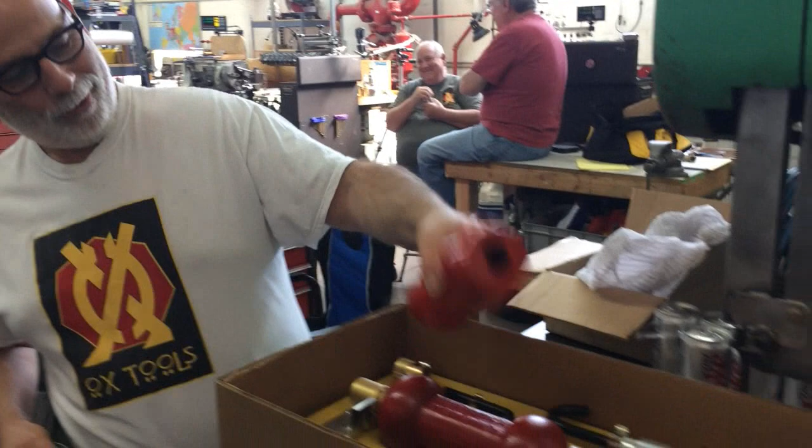So, 6.5 pounds of Channellock persuasion. It's pretty good, for when you really want to beat on something. Adam, you wish you had one of those?

Cool, thank you, very nice.

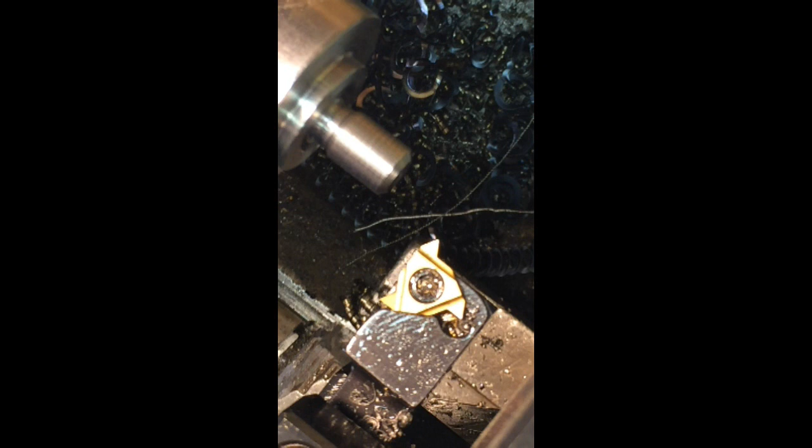This is going to be 3/8-24, a little threading. Need to make a quick arbor. This is the nut part of the arbor. So let's do some threading.

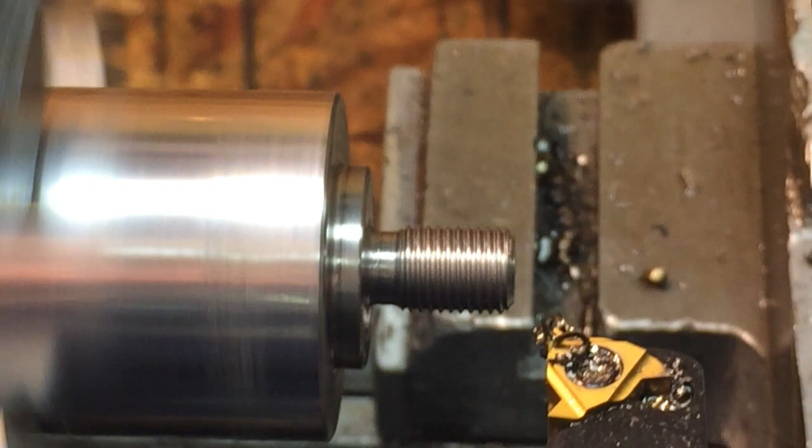Too much vibration if we have it mounted right on the tool post, so we're trying to do a handheld thing here. This is hard to do.

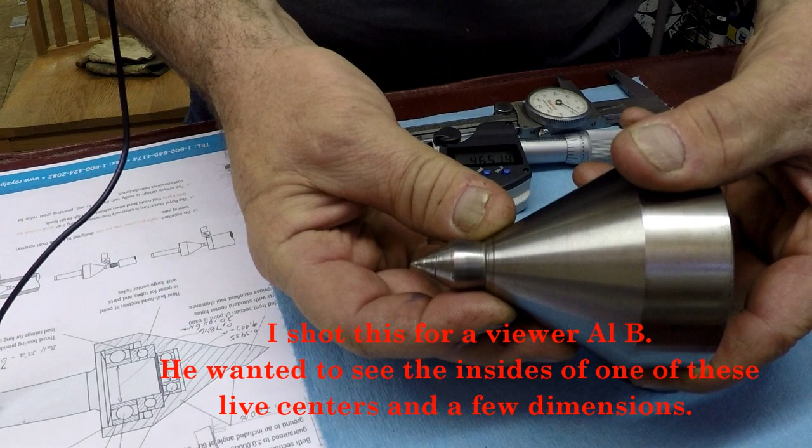Right, that's enough of that. This is my Royal Live Center. It's a Versa Center, part number 10833.

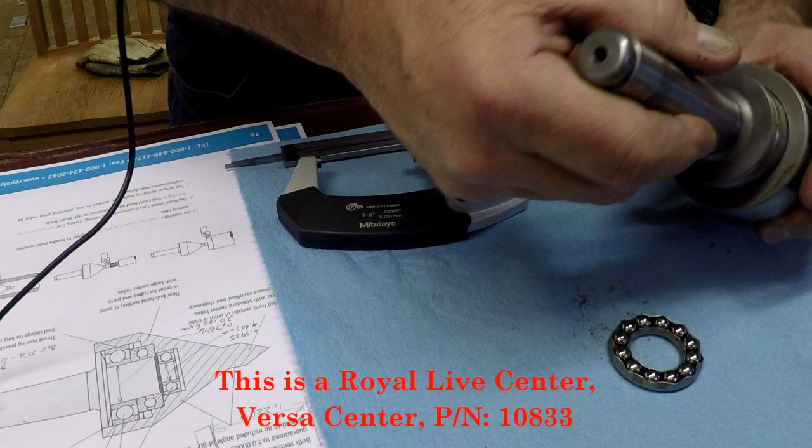Like I said in the email there, but anyway, I'm looking at the thing and I'm going, oh boy, how's that come apart? There's no screws, there's no set screws, there's nothing, you know. So looking at their drawing - thanks for supplying or giving me a link to that, I never even looked it up before.

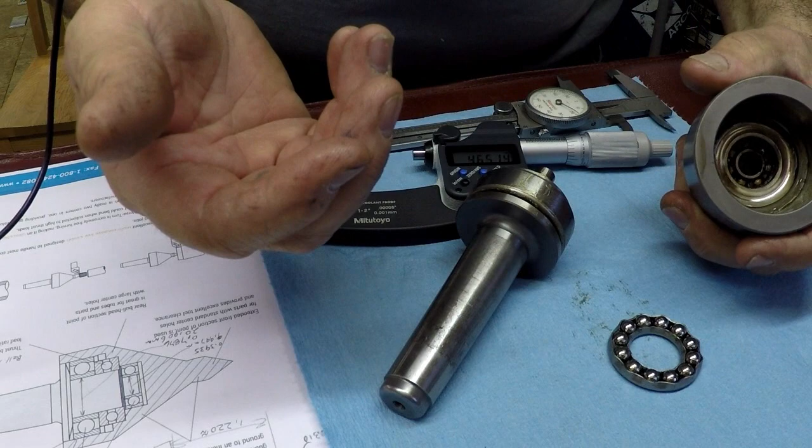So I go, well, I'm just going to hold it and see if I can tap this part off, right, this part here. I just started tapping on it with a dead blow hammer, a soft hammer, and it came apart. It took a little bit, but it wasn't too bad, it came right apart.

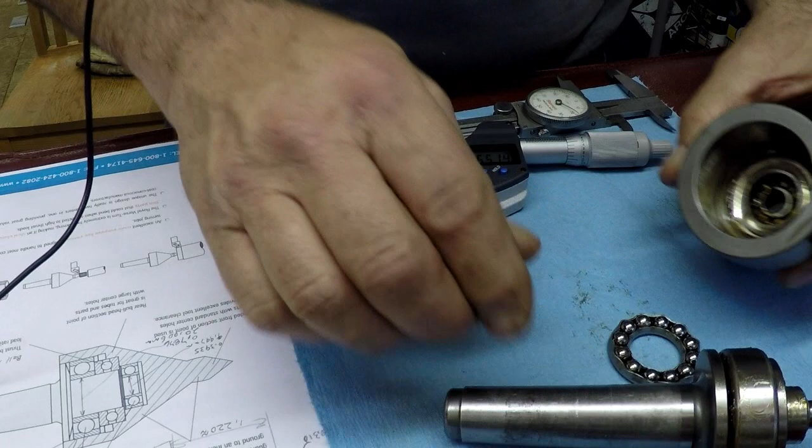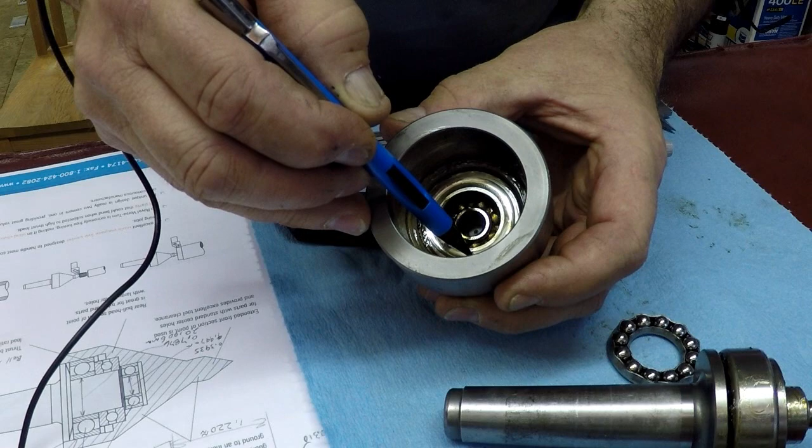So anyway, this is kind of what it looks like. I'm not going to take this part's insides out. This is half of the race for the thrust bearing, and that actually turns in there, but I can't pull it out. It probably would come out pretty easy, but there's no need to.

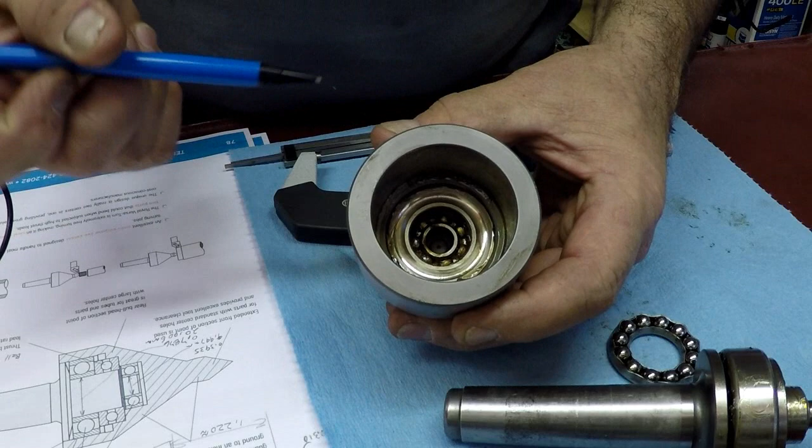Then there's the small bearing. As you refer to the drawing, you'll see the small bearing down in there. Now I don't know what the OD of that bearing is, but I measured the shaft for you to get the ID. And I measured the large bearing that sits here, so I measured the ID and the OD of that, so you can figure that bearing out.

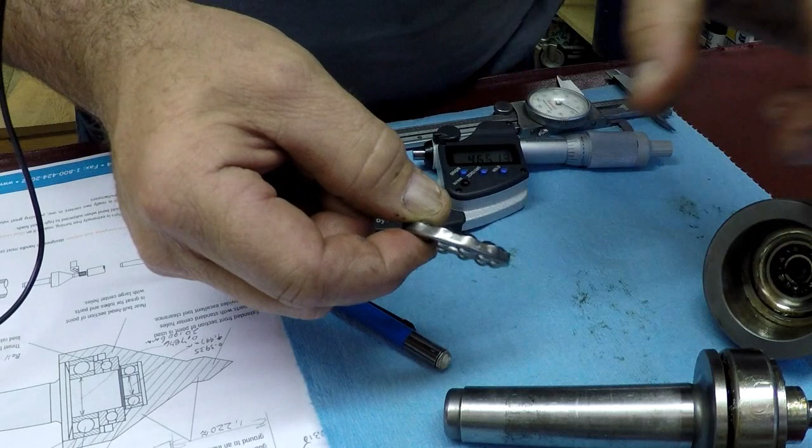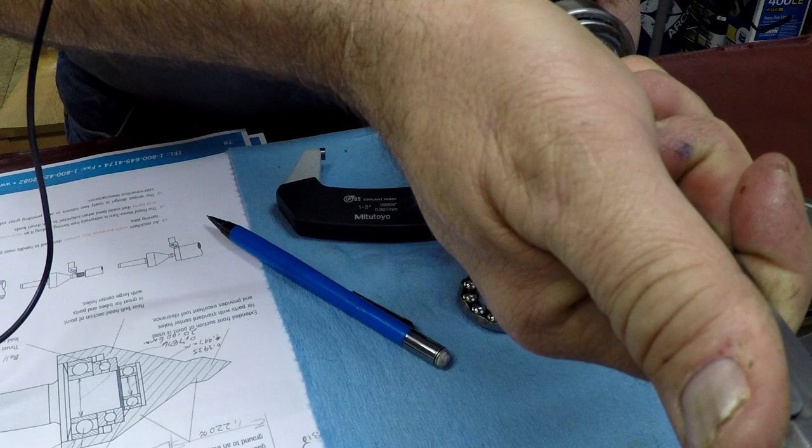And I measured the size of the balls of the thrust bearing. So here's the thrust bearing, just one of these open cage ones with 2 hard faces. These faces aren't real thin, they're about 0.140 to 0.150 thick, these faces for the thrust bearing. So there's 2 of those, and the balls - this sits in here - the balls are 0.281 in diameter.

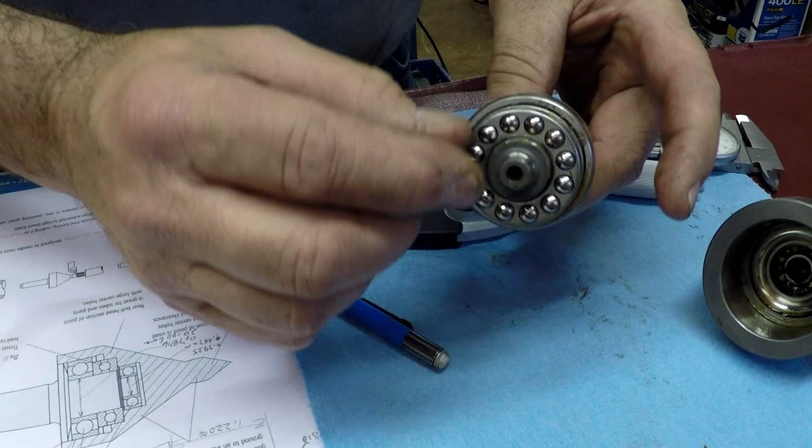So that thrust bearing is a little bit thick. But I measured the small part of the shaft for you. This part of the shaft is - I don't know if it's the same ID as this big bearing. And I can't read the numbers off the big bearing.

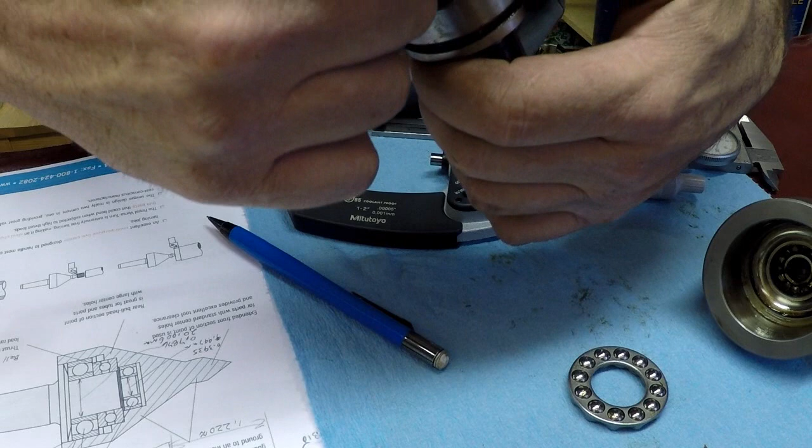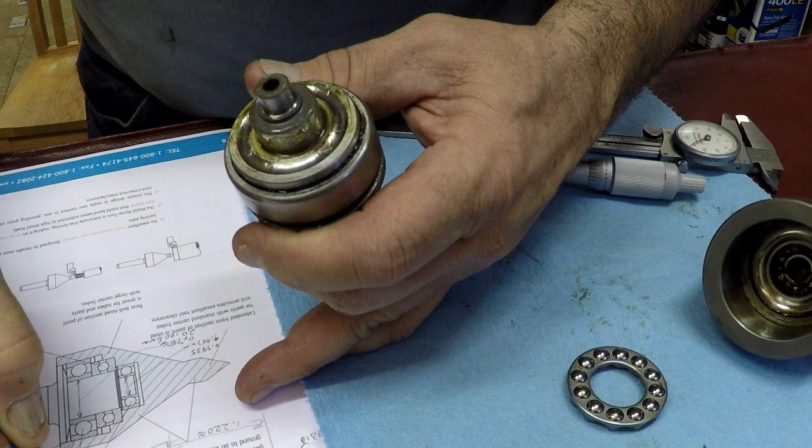Oh, it's an NSK. Oh, there it is, I can read the numbers - I'll take that back. 6204. So this big bearing's an NSK 6204 bearing. I'll put all these numbers in the email. I don't know what the thrust bearing is, and I don't know what the small one is down inside.

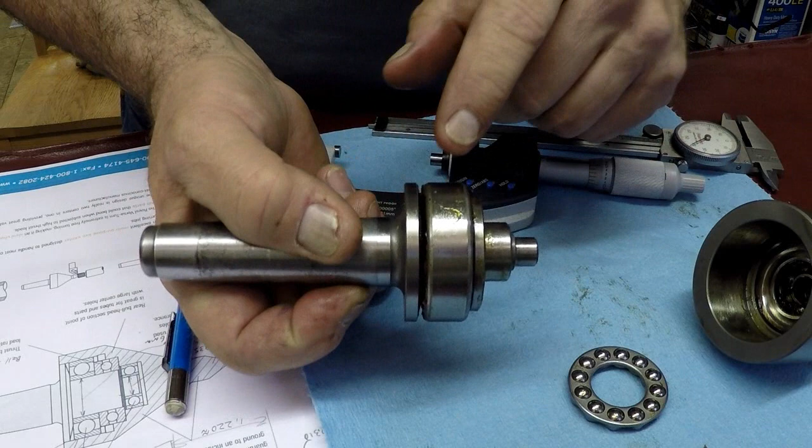So the shaft is obviously pressed onto the big bearing. This shaft is all one piece. This flange here, and this flange has a slope to it, and everything's got a radius. Down in here, right down in here, there's a small radius to give it some strength - anti-fracture - and I'm sure it's all hardened. But this bearing's pressed on there. This is pressed on too.

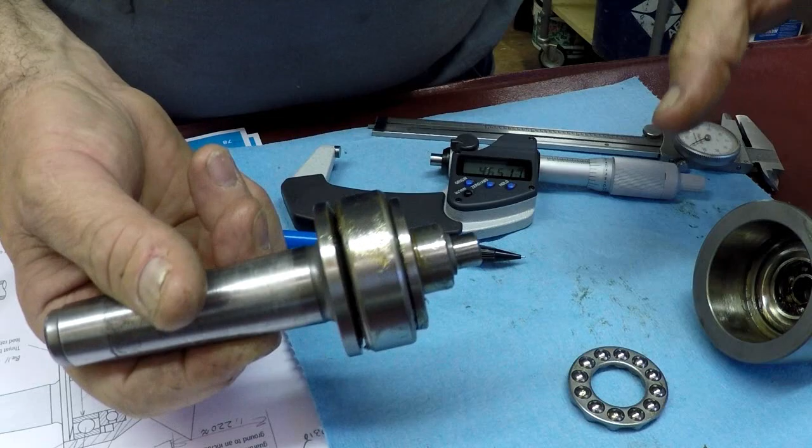So, lightweight grease, and that just goes right in there. The press fit for that on here is not that much - I mean, it's a little bit, but I just knocked this part off with a dead blow hammer, small one. So it wasn't too bad.

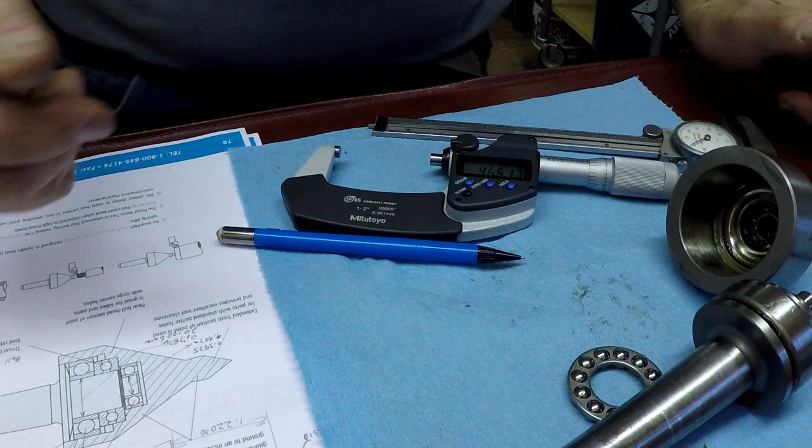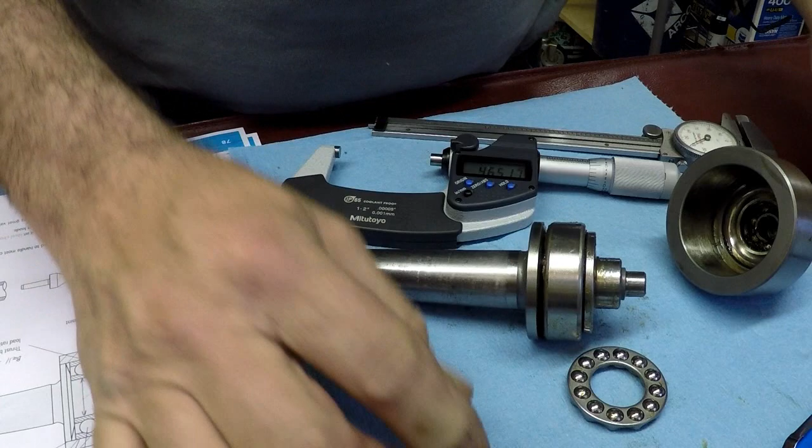I made a measurement of how long this is. I'll make a little drawing or something, and how far it is from this flange to the end of this one. I'll give you some ideas. I'll measure this as the diameter here for you, and the length - they give you all that in the drawing.

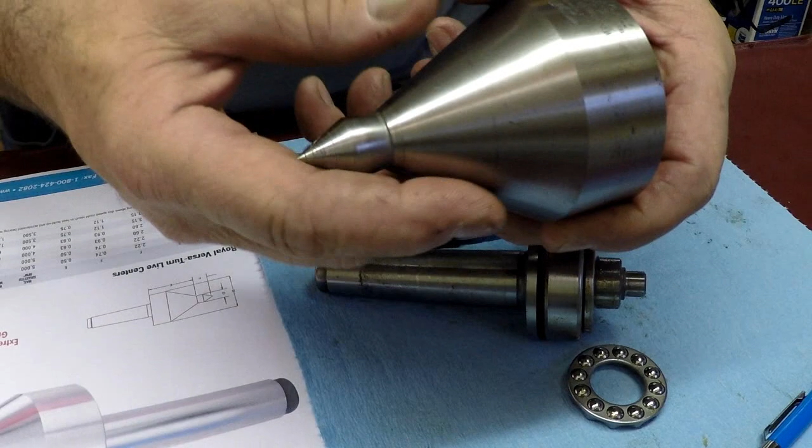I'm going to take that back - they give you all that information on their drawing, the length and the diameter of the center. So that's pretty good. Anyway, so that's about it, it's not a lot to it there, pretty simple.

This one's a Morse taper number 3, their heavy duty version. Now, I found mine on eBay. This thing is in great shape, like perfect condition, except there's a little ding here and some marks - somebody made some cuts or something into the tip of this, and I hope to regrind that one of these days.

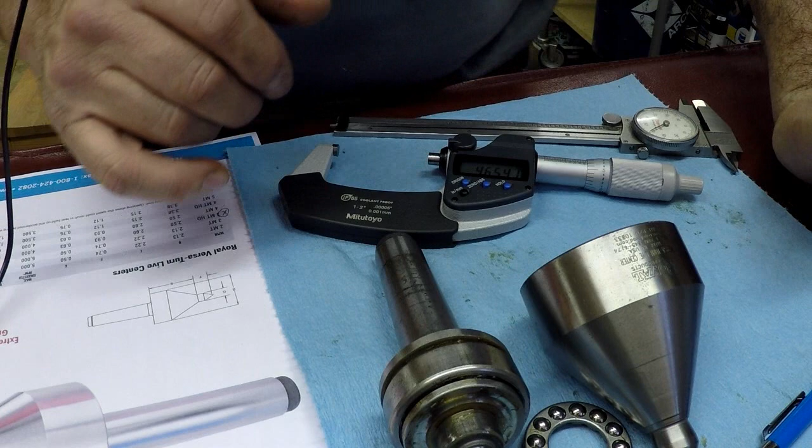Anyway, I got this - well, these things here, this price sheet says they're about $393 from them, but I found it on eBay for dirt cheap - I want to say it was less than $50. So I'm pretty lucky, but anyway, it would be a fun project to make one.

I'm gonna make sure everything's clean here. I think I'll put some new grease on that, a little bit, just a dab, before I put it back together.